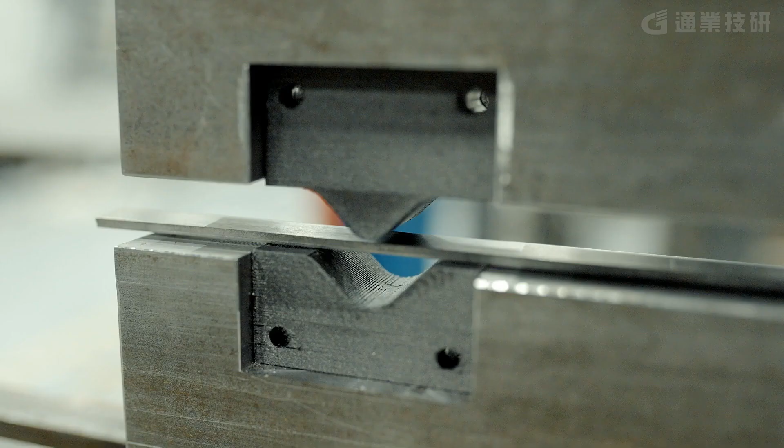Hi, I'm Thomas Whiting, Stratasys Applications Engineer for Manufacturing Solutions. I'm going to show you the benefits of using FDM 3D printing technology to make metal forming dies and press brake tooling, and then I'll show you what's involved in designing them.

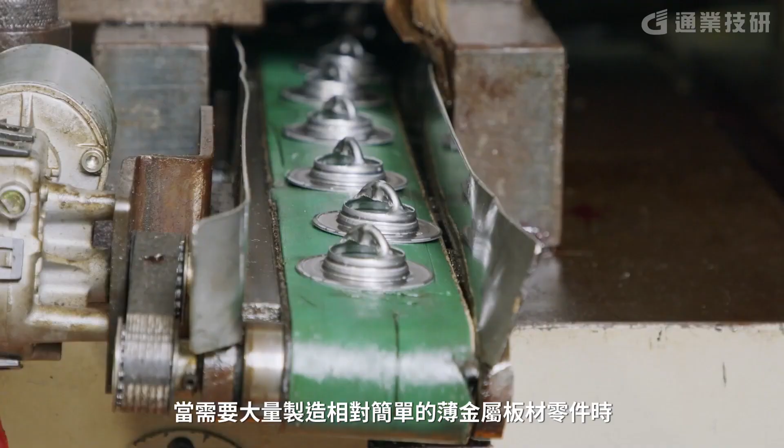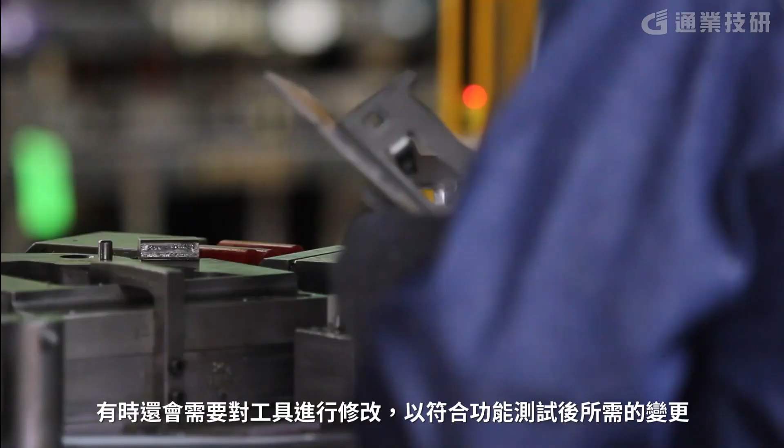Typically, metal forming dies are used in the manufacturing process when thin, relatively simple sheet metal parts need to be made at scale. Most of the time, these dies are machined from tool steel, which is time-consuming and expensive, especially for low-volume production. Sometimes revisions are made to the tool to account for changes needed after fit and function tests. This requires additional machining that adds time and cost to the overall project schedule.

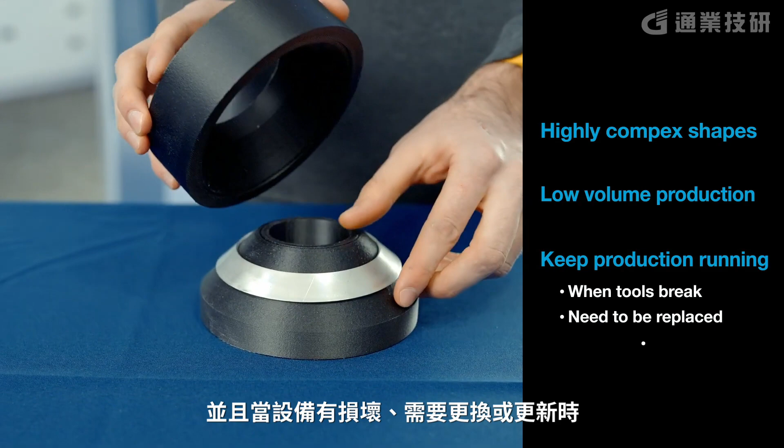FDM 3D printing is a great alternative to machining, especially for highly complex shapes, low-volume production, and to keep production running when tools break, when they need to be replaced, or require updating. FDM 3D printed forming tools are ready in a very short time with minimal impact on the production schedule. This gives you control when your supply chain is disrupted.

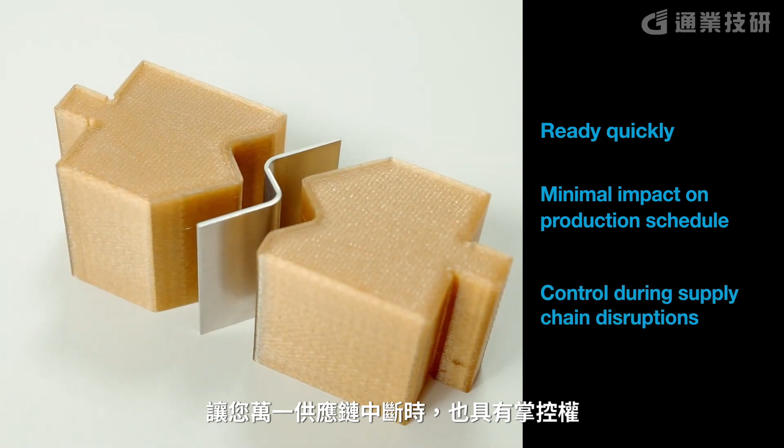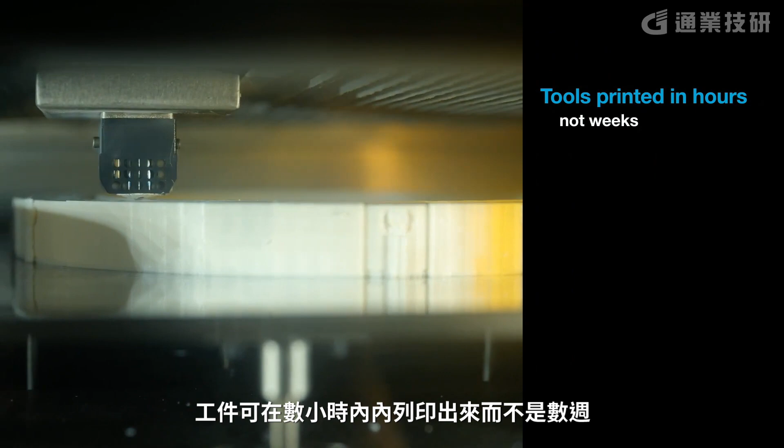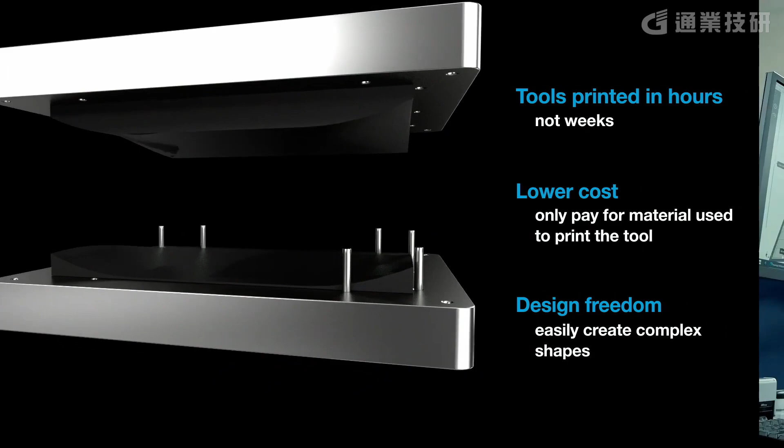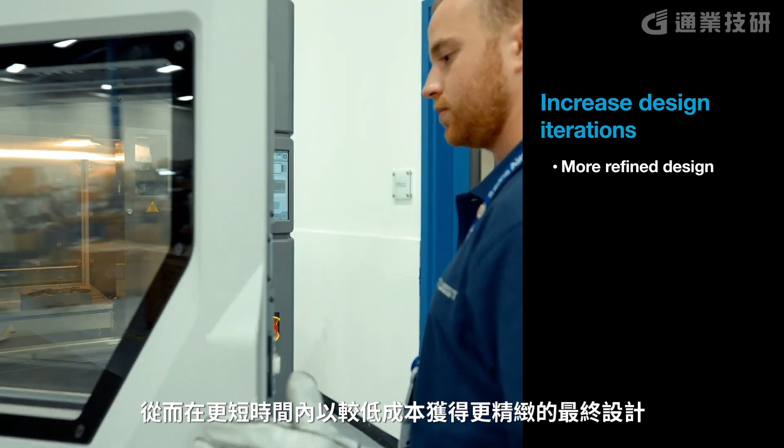So the main benefits of 3D printing these tools are the speed, lower cost, and design flexibility. Tools can be printed in hours instead of weeks. Cost is lower because you're only paying for the material used to print the tool. And 3D printing's design freedom using Stratasys support material lets you easily make complex tool shapes that may be difficult and time-consuming to machine. Additionally, by utilizing FDM 3D printed tools, you can increase the number of design iterations during the development process, leading to a more refined final design in a shorter time period and at a lower cost.

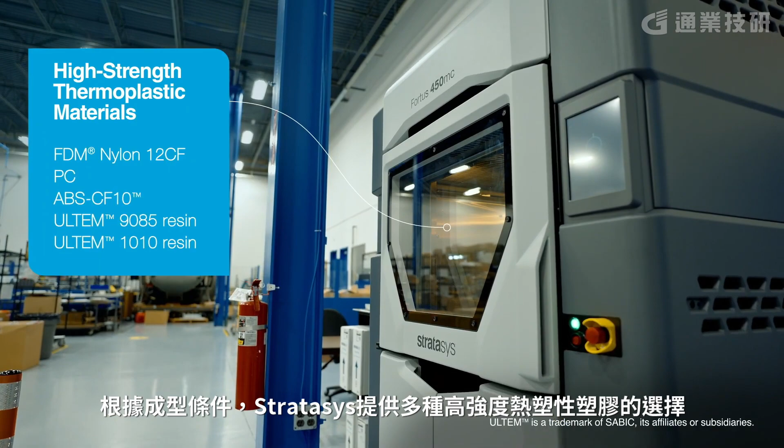Based on the requirements of your forming operations, Stratasys has several high-strength thermoplastics available to choose from. Here are some considerations when designing your 3D printed metal form and press brake tooling.

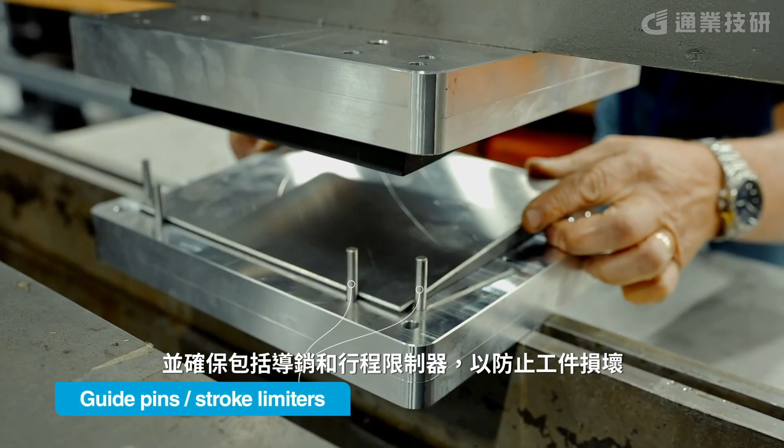Create your tool using the same design philosophies used when designing metal tools. Be sure to include guide pins and stroke limiters where necessary to prevent tool damage. It's preferable to make the tools as a single 3D printed part to prevent weak spots.

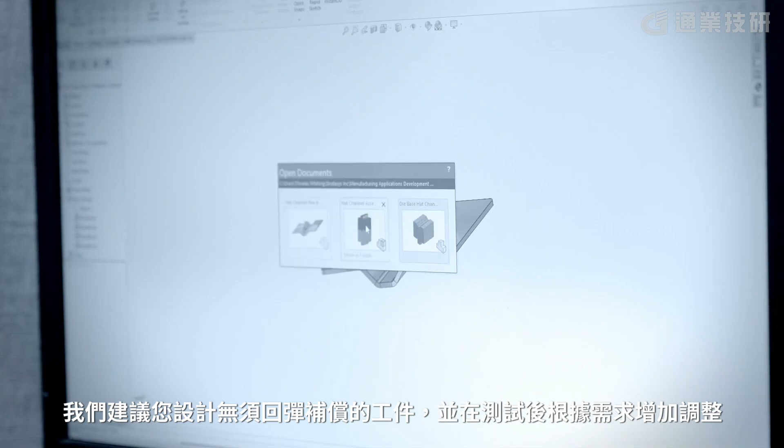Under the forming pressures, an FDM tool may have a small amount of deflection that decreases or eliminates the amount of springback in the sheet metal component. We recommend designing your tool with no springback compensation and add it in, if necessary, after testing.

Part orientation is important because it affects the compression strength of the final part, and it also affects surface finish of the tool, which could transfer to the formed part depending on gauge thickness. It's best to print tools with solid infill and multiple linked contours in order to increase strength.

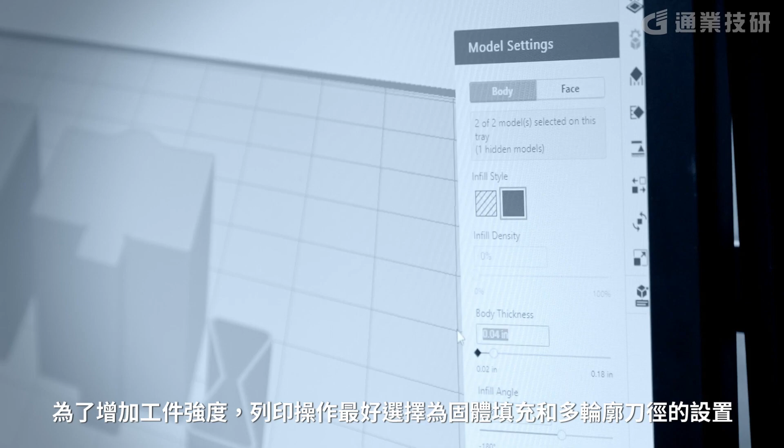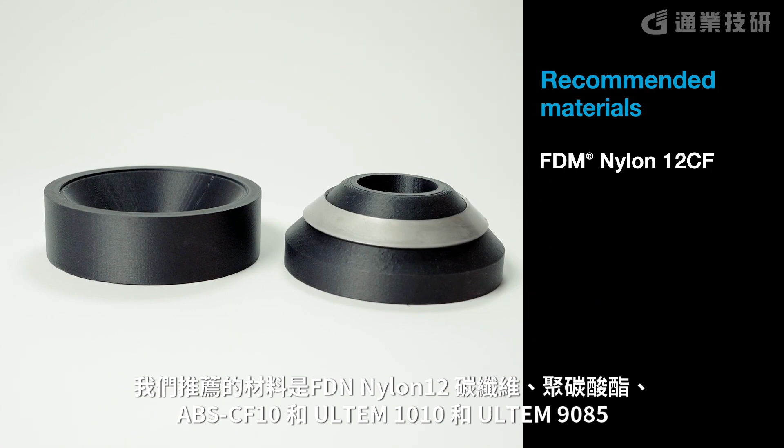It's important to match the material to the requirements of your forming operation. Our recommendation for materials are FDM Nylon 12 carbon fiber, polycarbonate, ABS CF10, and Ultem 1010 and Ultem 9085 resins. Please refer to our material data sheets when choosing your material.

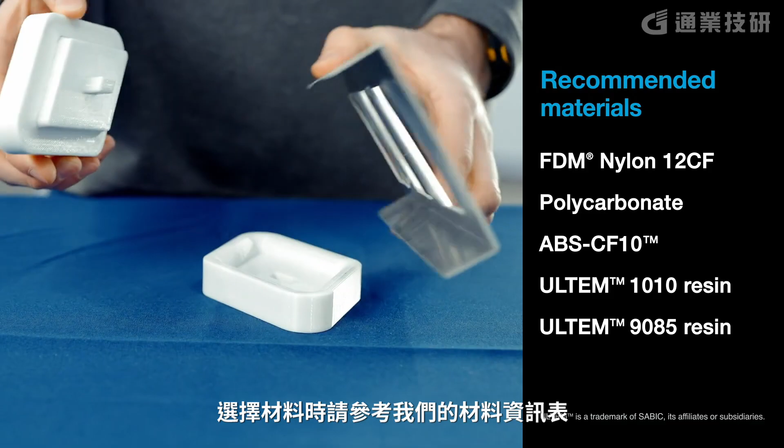3D printing metal form tools with FDM technology isn't difficult and offers multiple benefits over making them with traditional methods. To learn more about this application or other 3D printing manufacturing solutions, contact your Stratasys representative or visit stratasys.com.